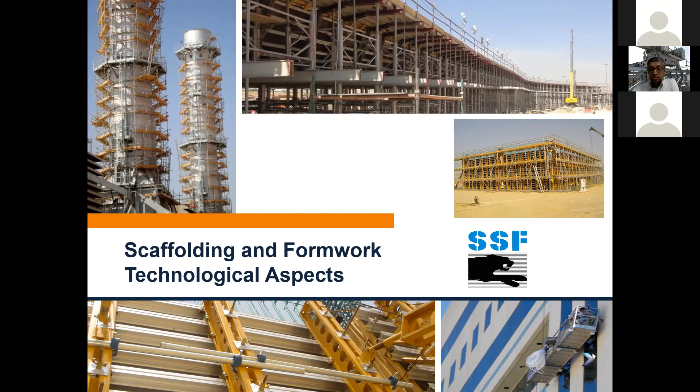So this presentation, this web seminar, I have named it Scaffolding and Formwork and the Technological Aspects. Basically, we are a scaffolding and formwork company, with a lot of projects in Saudi Arabia, Qatar, Dubai, Kuwait, etc. So let me start with a small introduction.

Basically, this will be an interactive section. You can stop it any time if you want, or you can ask questions any time. I will ask you a question as well. So, all right. Okay, can you see the next page?

Still not showing, but I think probably still loading. Taking time. Hello, can you? Yeah, we can see it now, we can see the slides. Okay.

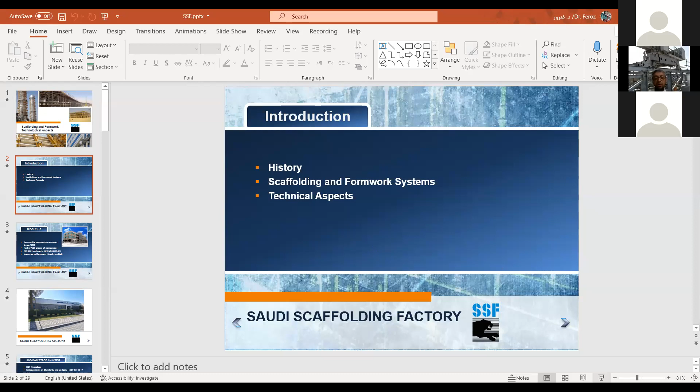So I'll start with a brief introduction of the history of our company. Then we'll move on to the scaffolding system, followed by the formwork system, and some brief technical aspects on this.

Saudi Scaffolding Factory is established since 1982. I've been in this industry for more than 35 years. We have a factory in Dammam, and we have branches in Dammam, Riyadh, Jeddah. Basically, we cover all Saudi Arabia. We have a good reputation because we are a local company, and a lot of prestigious projects - Aramco, Sabic, municipality - all these projects we have taken and completed successfully.

We are a part of ABT Group, which is located in this building you might have seen in Khobar, Al Bustan area, Rakah. This is also our main company, which is famous for distribution for cement. We are an ISO 9001 certified company. We have auditing every 6 months, so this makes sure our quality and safety of the products. And this is again one of the requirements for Saudi Aramco and Sabic.

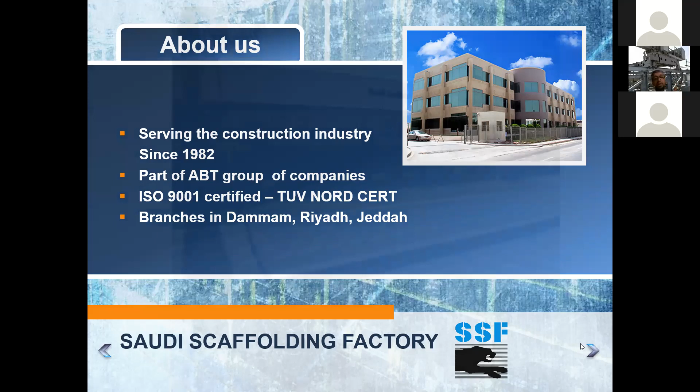This is our company, our factory in the first industrial area. The look from outside, on the road, what you can see, it will be like this. So the factory is based in Dammam, where we manufacture our scaffolding and formwork products, and I sit in this office also. We have a design team here in Dammam and in Jeddah and in Riyadh.

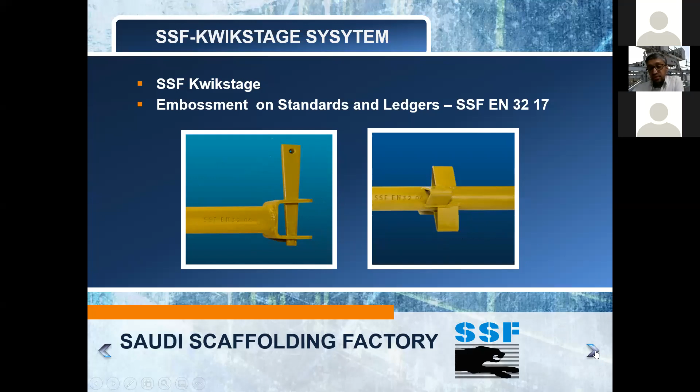We have different systems for scaffolding. Basically, this is a pipe or tube or circular hollow section - the terminologies I'm saying - fitted with some connecting components. The one on the left is called the ledger, and the one on the right is called the standard. The ledgers are horizontal members, whereas standards are vertical members. These systems are approved by Aramco, and there are some specifications Aramco tells us to follow - standards which is called EN 10219, and the diameter should be around 48.3.

And based on this, we have to do some calculations and prepare some grid sizes for the particular load, light duty or medium duty. This is actually part of what I'm saying about scaffolding. And then there are different types of scaffolding, which I'll explain you with the photos - then you'll have a better understanding.

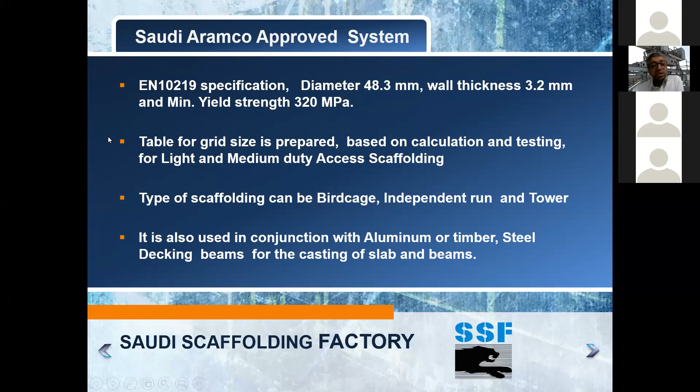In that one, I'll briefly give you one small video to give a good understanding of how this system works, how this system is installed. Okay, one second.

Can you see the screen? Not yet, we're still looking at the slides. Slides, yeah.

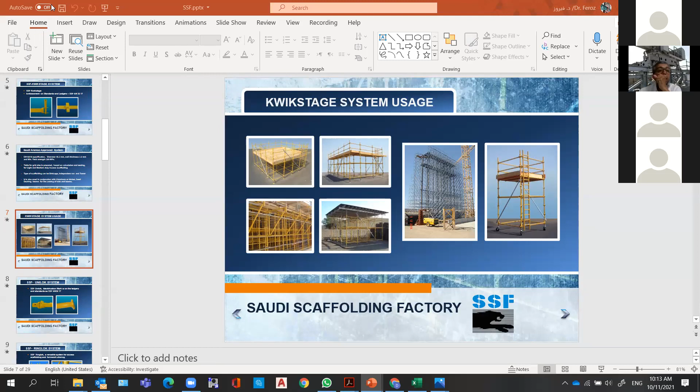Still not showing. It's a bit slow, that's why. Is it showing now? Not yet. Okay, it's showing now, we can see it now.

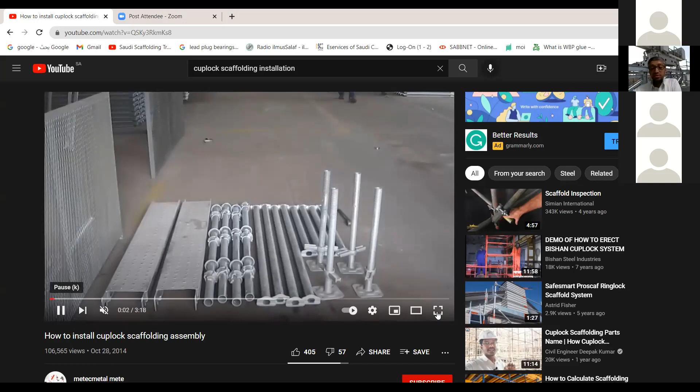The video you can see now, yeah? Yeah. This is how we install. These are called the base jacks.

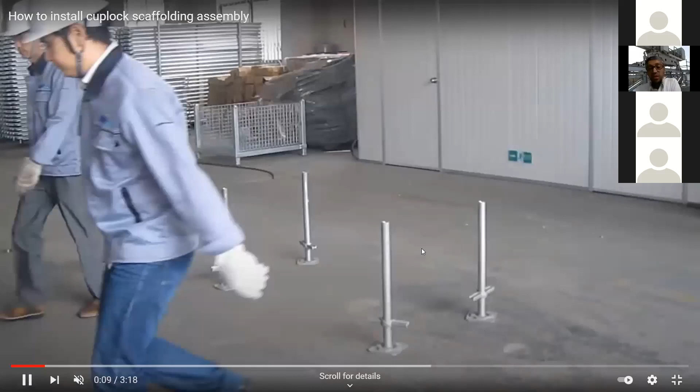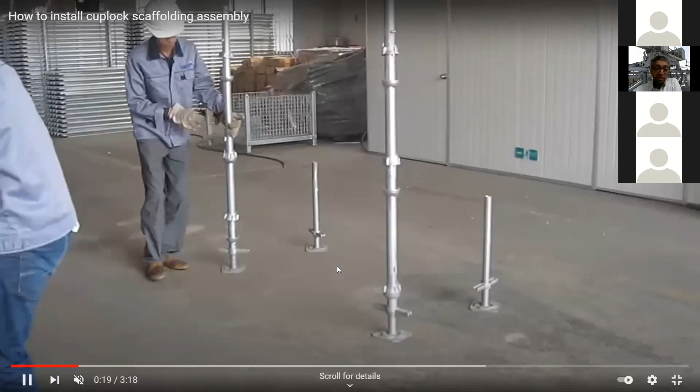So we'll put 4 base jacks. It's clear now, yeah, it's clear. Then they'll put the standard inside the base jack. The purpose of the base jack is to adjust it so that it's leveled properly, with no inclination - all vertical and horizontal.

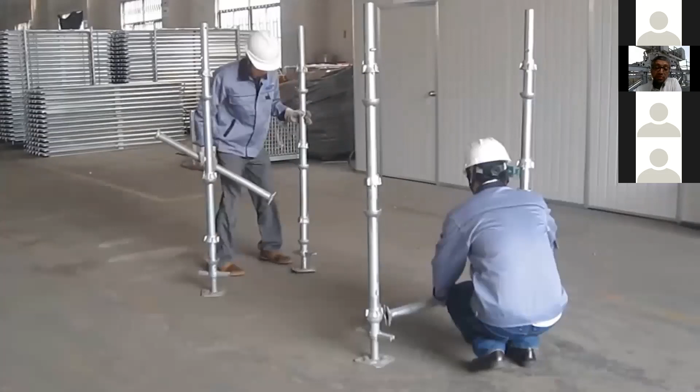So this is the component called the standard or vertical member, which has connections called top cups and bottom cups. In between the top cups and bottom cups, they insert the horizontal member, which is the ledger.

Once they insert the ledger, you get one part, and like that they make a frame, which you can see. They will tighten it using hammers. All these are steel members.

Like this, they form depending on the lift height. This lift height we calculate as per the load, to determine what will be the next lift of the horizontal members. Usually, for access scaffolding, it will be 2 meters.

If it's slab support with heavy loads, we'll have to put supports every 0.5 meters. These top cups and bottom cups will come every 0.5 meters. So the minimum height will be 0.5 meter, and the maximum height can be multiples of 0.5 meters.

So these members, we manufacture here.

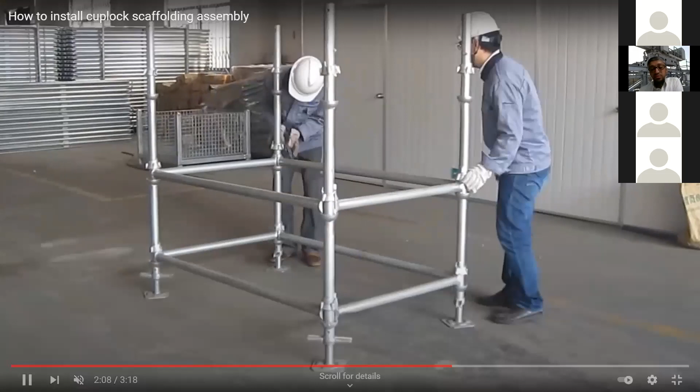You can see it is tightened using slight hammers. Very easy to fix - within a few minutes, it will be ready.

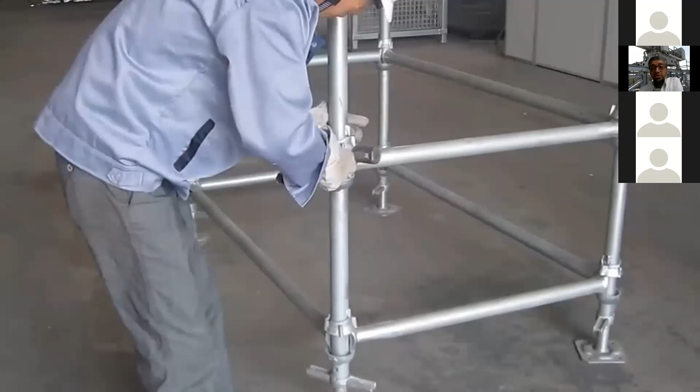So this can be used as access scaffolding, or it can be used as shoring to support slabs or beams, like that.

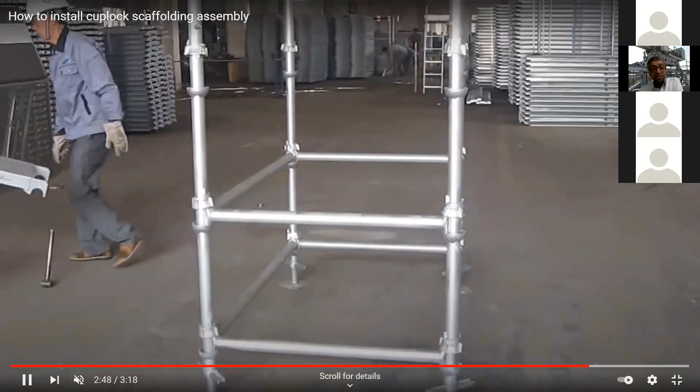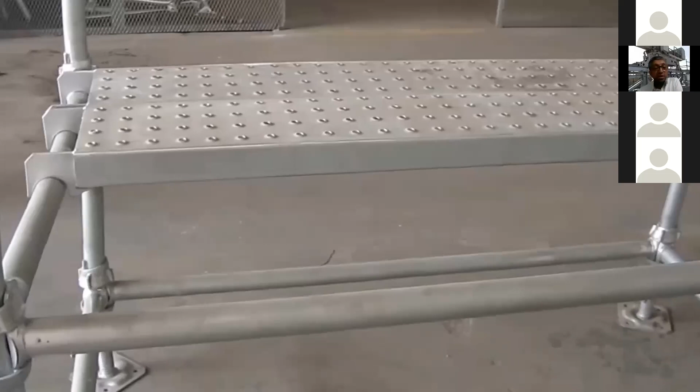So this is basically access scaffolding with steel planks. These steel planks we also manufacture. This can be timber also, so based on the area - if we need more fire safety requirements - we need to go with steel planks. Steel planks have perforated holes which protrude out for grip so that you won't slip.

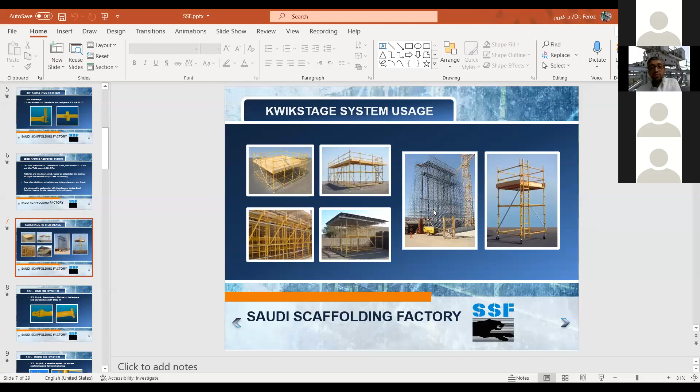So back to the slide. Can you see the slide? Not yet. Yeah, it's okay now.

So like that, you can form different types of structures. As I said, there is bird cage, there is independent run, there is shoring system, there is bird cage for some simulation, there is mobile tower - you can put a wheel on the bottom and it will be mobile, like that.

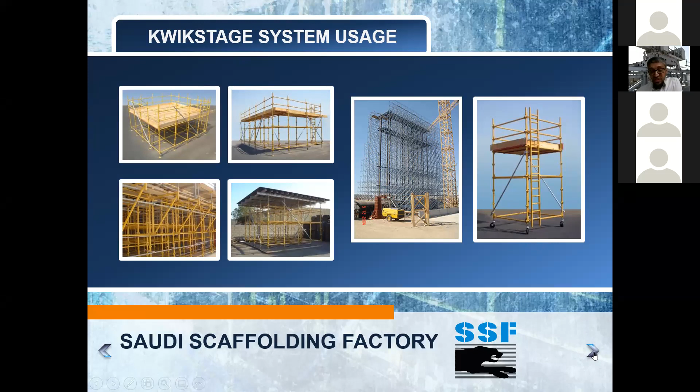So this is one sort of system called the Kwikstage system. We have 3 stages. When you saw it on the video, which is one more popular in the market is called the Cup Lock system. I will show you in a minute.

This is called our SSF Unilok system, which is also Aramco approved. This will look like this - the left one is the standard, having a top cup and bottom cup, which stays vertical. And this is called the ledger, which has a blade at the end.

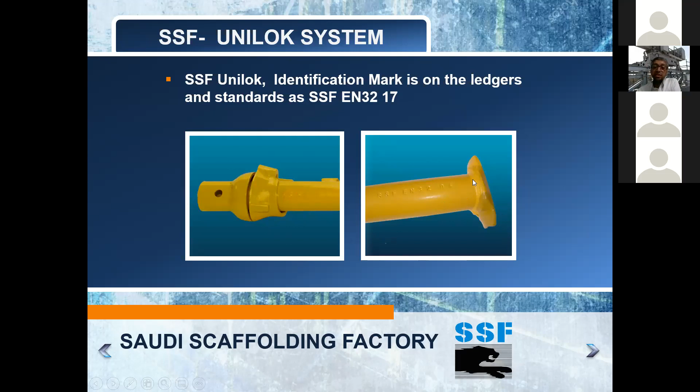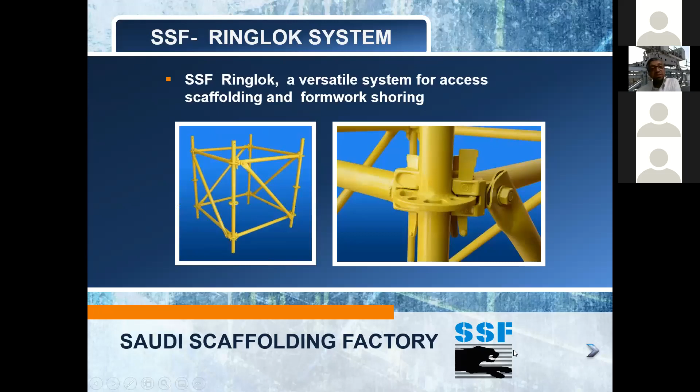As per specification, Aramco has put a specification. It has to match the specification given in their Construction Safety Manual for Scaffolding and Formwork, which is EN 10219 with minimum yield stress of 320, like that.

Based on that, for different grid sizes, we have to prepare testing and do the calculations. We need to submit for third-party approval, then Aramco will approve. Only then you will know we can use it, and only then you become an approved vendor.

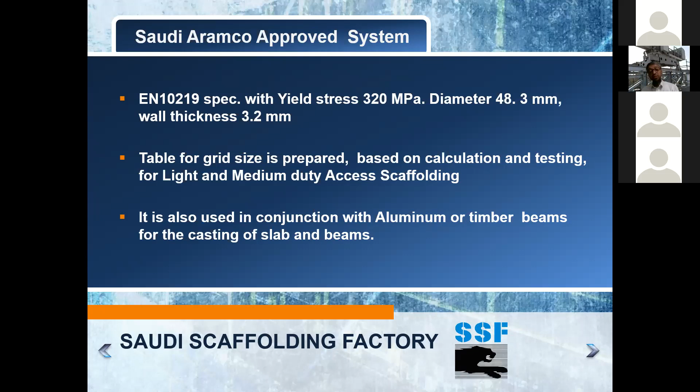This is one of the other interesting projects we did for the Kingdom Tower in Riyadh, which is a hanging scaffold that doesn't use system scaffolding, but is called tubes and couplers. The couplers are the connection part - the horizontal and vertical members are tubes only, but the connection is achieved using couplers.

There are different couplers - right angle coupler or double coupler, then swivel couplers are there, like that.

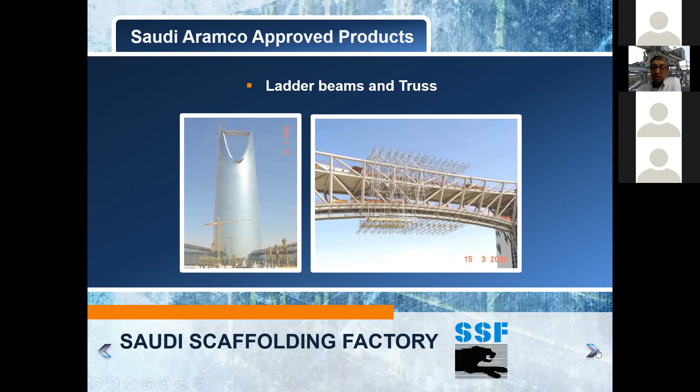You can see the tower now. Yeah, we can see it's supported with another beam called ladder beams. On that ladder beam, we use it as platforms. The scaffolding is supported by the truss at the top of the tower. Yes, that is called a ladder beam, not a truss. A truss can have diagonal members also, but this has all vertical and horizontal members only.

So as I know, for that Kingdom Tower, we used tubes, couplers, boards, and other accessories.

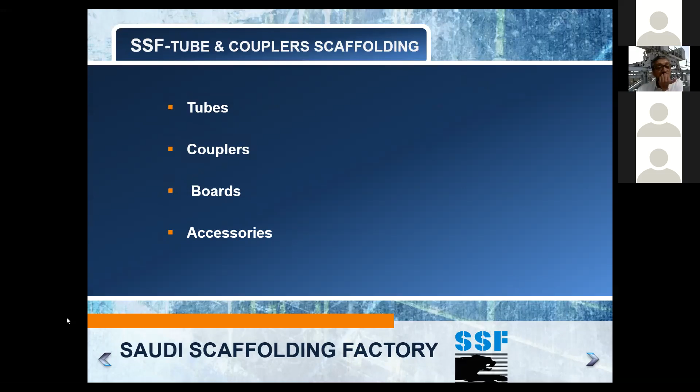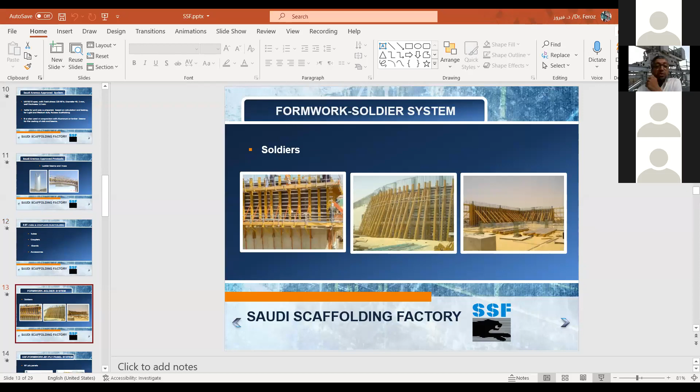Now we will move to the formwork part. Yeah, we can still see the slides. These are the various projects we did for Aramco with soldier and aluminum system.

The first one is done in two pours or two cycles. Once you finish the first 4-meter walls, it moves up to the next floor using access cantilever brackets. The second picture is a curved blast wall for Aramco petroleum blast walls. The third one is the same project, showing all the soldier systems.

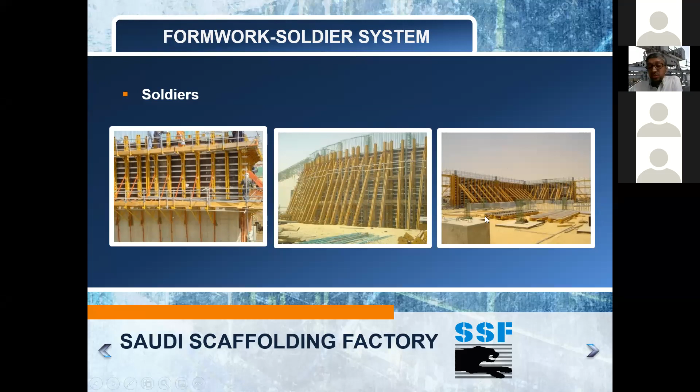Soldier and aluminum systems - this soldier we manufacture in aluminum. There are aluminum manufacturing companies near us like Alupco; they extrude it and supply to us.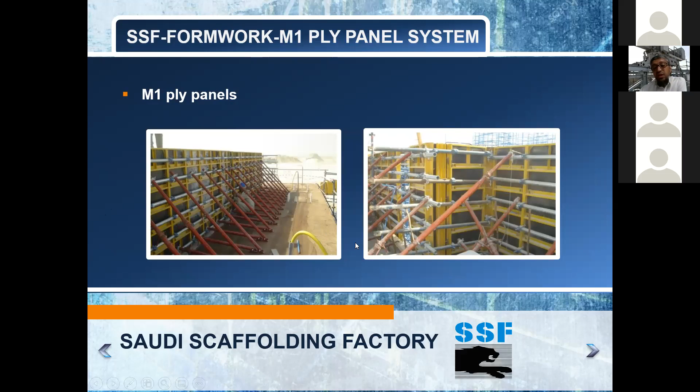This is another system we have, called the panel system. This is again for small wall construction, small foundations - a highly versatile system called the M1 panel system. This also we manufacture.

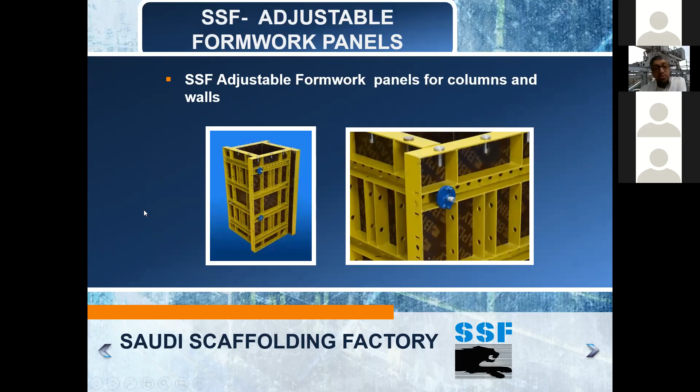Then we have an improved version of the M1 panel system, an adjustable panel system for the column size. As you know, in one project you have different sizes of columns, but with these adjustable panels, you can make an adjustment of 5 centimeters on columns. For example, if you use 600 panels, you can use it for 600 down to 300 on one side. So this is the advantage of this system.

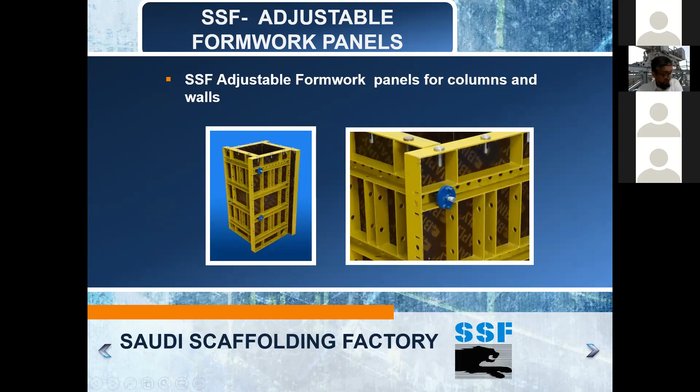Then the other product we have is the twin waler system. Again, this is channels, UPN channels, double back-to-back, usually used in adjustable panels for column formwork.

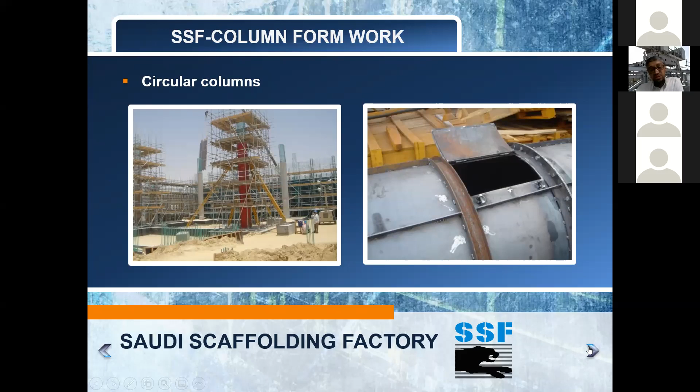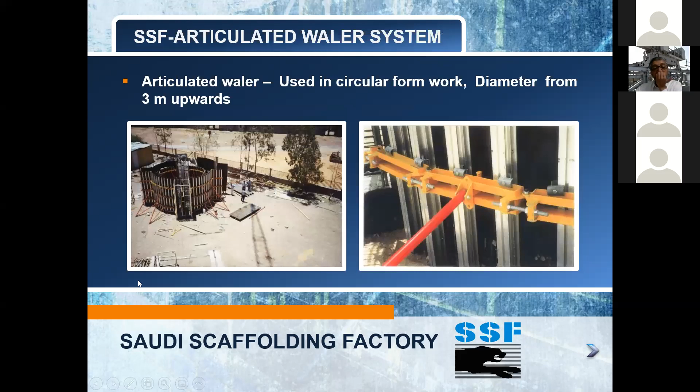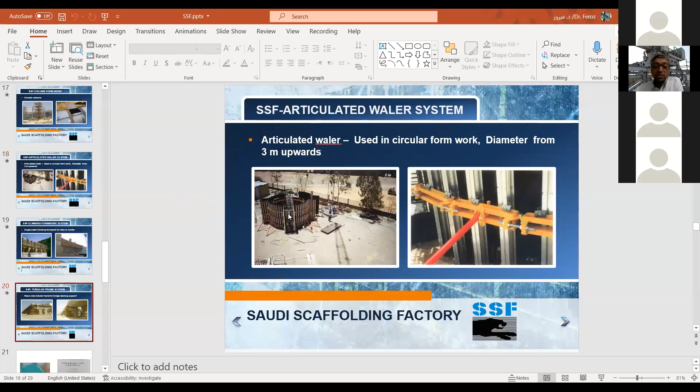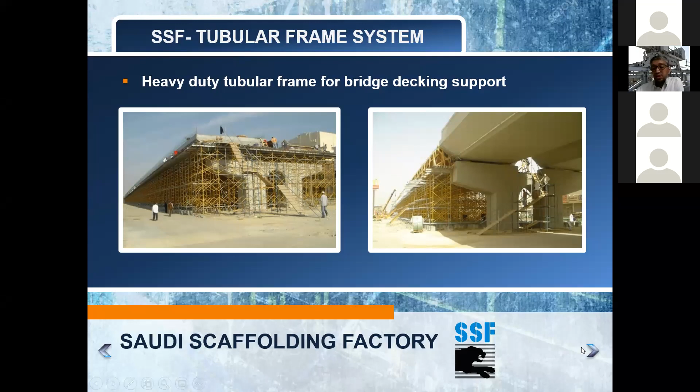Another important project we did was for the municipality - a bridge crossing the airport road in Dammam, which used another system called a framing system, because the loads were very high and the span of the bridge was also high. So it was a special frame we made for this bridge.

The book we follow for formwork is Formwork for Concrete. This is a very important book for the design criteria, all the rules and regulations - it covers all of this. For the scaffolding part, we have the Construction Safety Manual from Aramco, which covers scaffolding and formwork.

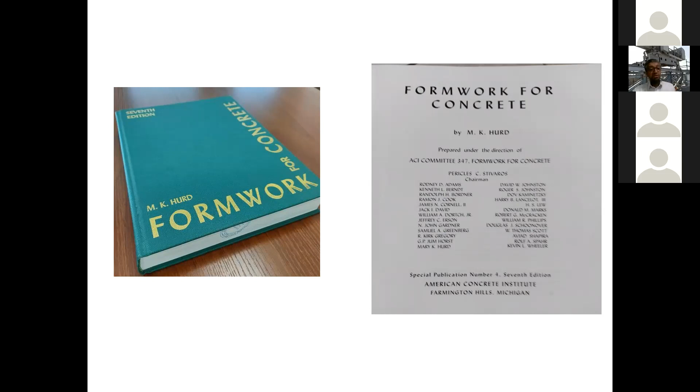So basically, this is what I wanted to talk to you about. That's actually all I have finished. If you want any additional thing, you can ask.

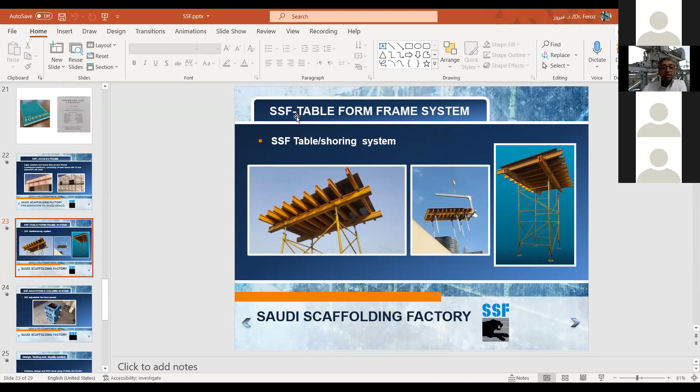I just want to ask you, Dr. Feroz, regarding the construction of the scaffolding or the formworks - are there any rules or guidelines that govern the construction, things that one has to look for, especially from the safety aspect?

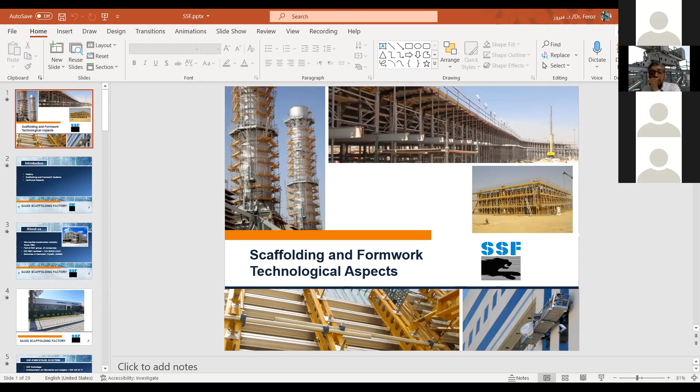On the safety aspect, as I said, there are design criteria we need to follow, and we need to submit all the certificates if needed. For example, if it's a tube, we need to give a strength test for each material coming on a regular basis - say for 40 tons of material we buy, we need to do one test. This is all as per the specification EN 10219, as I told you, and the Aramco Construction Safety Manual also has specifications. So we need to go as per that.

Then the third party, like Aramco's approved consultant, will verify it. If they have doubts, they will come here. We need to do testing in front of them, then demonstrate our calculations and design aspects. They will have many queries and comments, and all these things we need to clarify. Then only it will take in part, and all the possibilities of unsafety or not complying to the standards will minimize.

Okay, excellent. Regarding the issue of stability, because I can see here you have a very tall scaffolding system. This is how many meters? This is 60 meters. Wow, 60 meters, that's almost 20 stories. Yes.